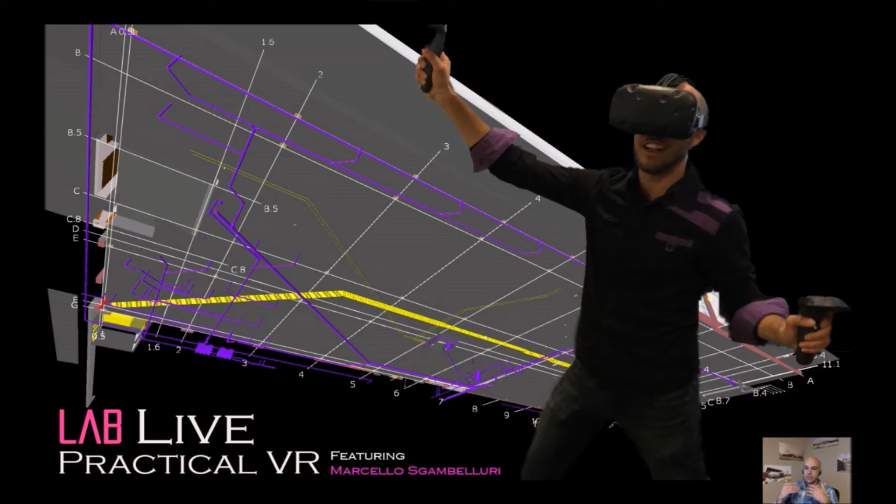What I want to do is introduce you guys to Marcello. Marcello is the BIM director and technical evangelist at John A. Martin and Associates. He manages and implements the research and development and the marketing of BIM, Revit, structural design software, and visual programming for the entire firm. He creates 3D digital content beyond contract documentation. I think that's super awesome. He also creates 3D real-time pre-rendered animation, the use of real-time physics, and the use of game engines for a variety of tasks. He trains and educates designers, engineers, clients, and basically anybody that wants to be learned up. He also creates tools and add-ins to improve Office BIM tools, efficiency, structural design tools, including Revit, Dynamo, Grasshopper, Rhino, Tekla, Stingray, SAP, ETABS, RAM, RISA, and many other software.

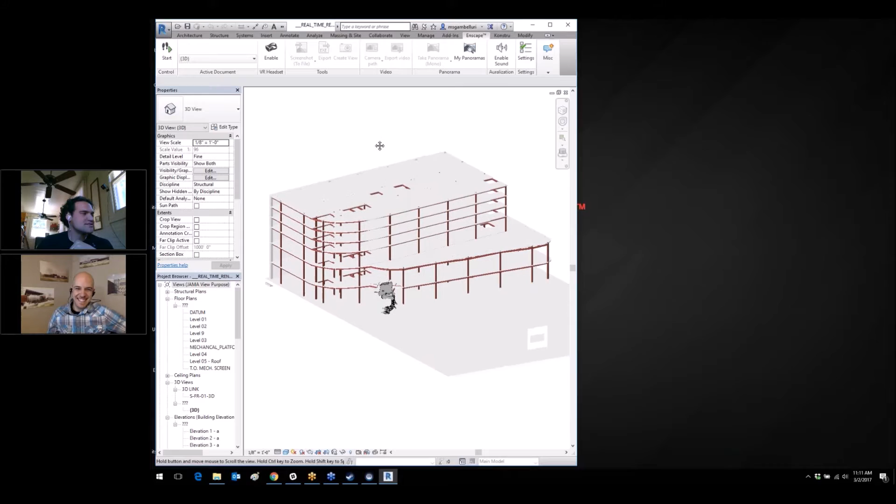I have a bit of a structure bias, so a lot of the examples will show structure, but this course could be applied really to any discipline. So you have your modeling software, whatever it is. In this case, I'm going to show Enscape. Enscape's a great product to get you in and out of real-time visualization, as well as virtual reality.

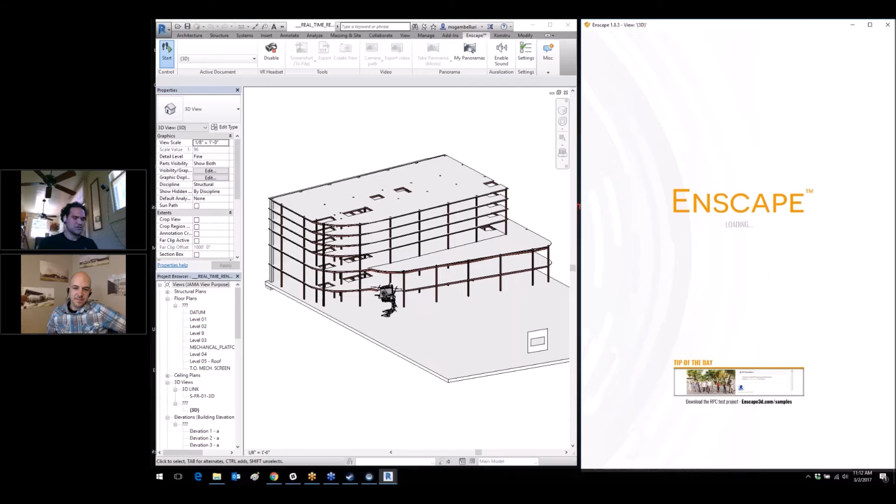All you do is first get yourself an HTC Vive or an Oculus, and then click this Enable button, and fire up Enscape. If you have the Vive, you can see behind me those are the sensors. There's another one in front of me that triangulates my position, and then I've got two handhelds.

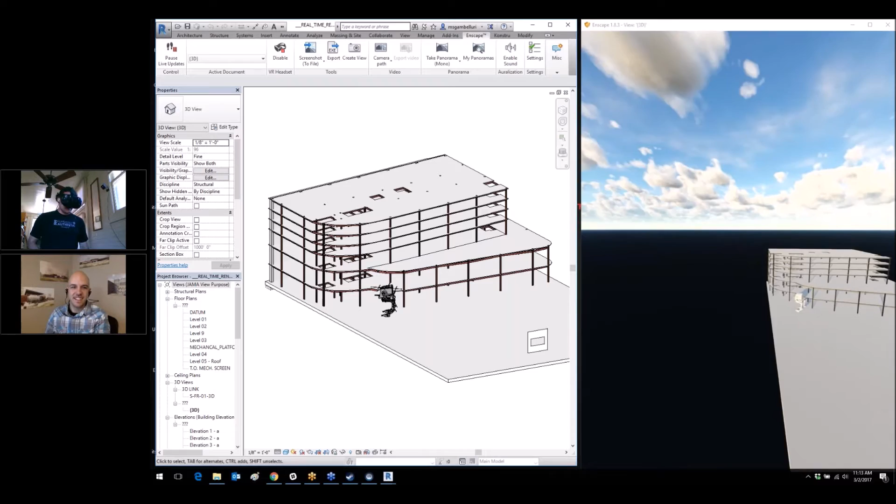You've probably been walking around the conferences and seen people doing this, so this is nothing new. But what's really amazing is everything's in real time. What I like to use virtual reality for, and real-time rendering, is actually quality control. With the controllers, you're not only looking through the model, but you can also quality control it. Using these pads, you can fly and float around.

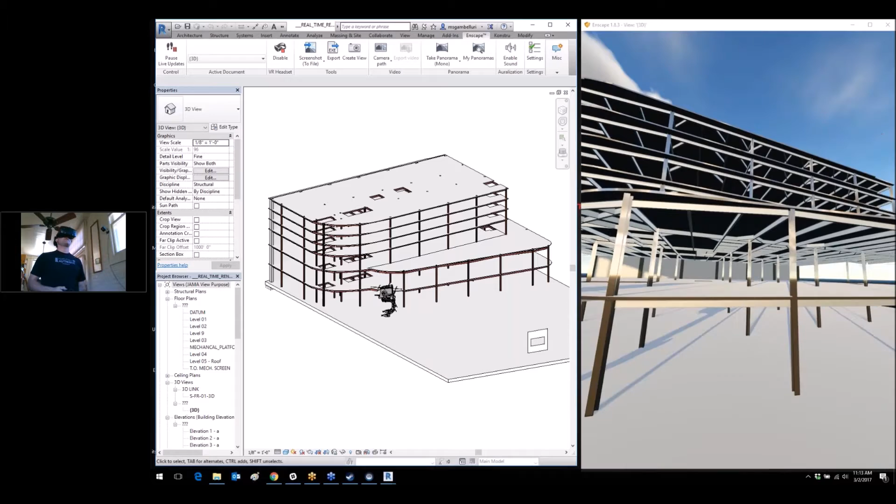We don't have time to go over the other products out there, but there's Iris out there—I saw that Anna's on the line too. They make a great product for visualization with Revit, SketchUp, and Rhino. And Enscape just added a beta version for viewing your SketchUp models. But basically, you have this amazing environment to do a lot of your visualization with.

So what we'll do in the office is build a model, and when it's done or in production, we'll go through and use virtual reality for quality control. A lot of times with virtual reality, you teleport a lot.

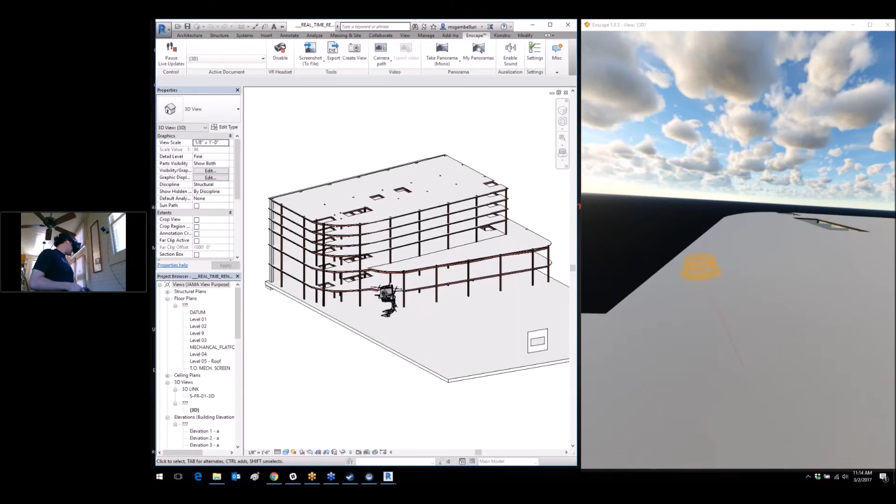The reason you teleport a lot is because when you actually move around, you can get quite dizzy. I thought I wouldn't be able to get dizzy, but you actually do. So you have to teleport around quite a bit. Of course, you can walk around as well.

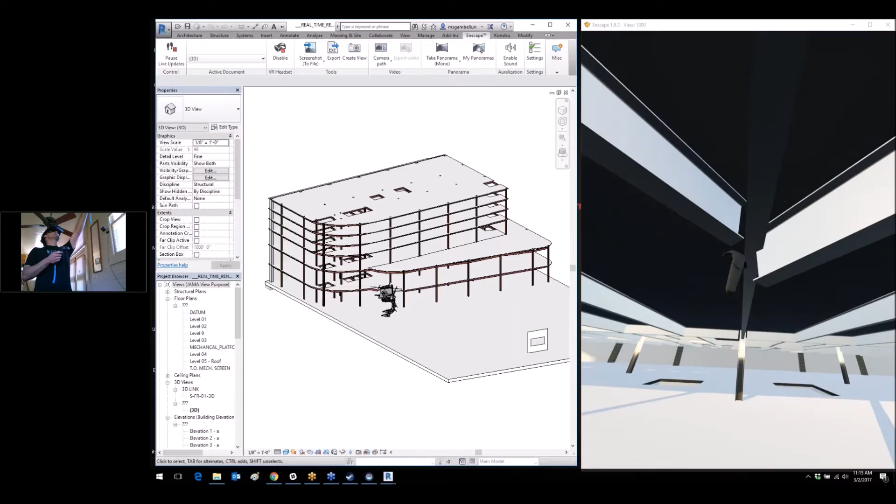We look around the model and try to find issues, and I actually found one right here. It looks like this kicker beam is actually too low. So there's a few things you can do now.

Because you're completely immersed in virtual reality, you can't see anything around you. So you could have someone working with you and tell them to fix that, or you can rip off your headset and go to your computer to fix it. But I'm going to show you a trick I do all the time that I don't think a lot of people know about, which is the HTC Vive and the Oculus allow you to toggle and see your desktop.

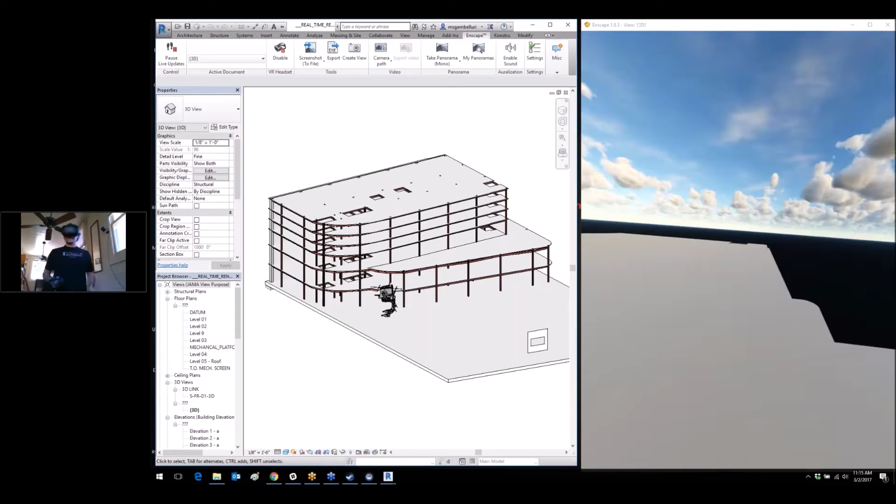So I'm going to go ahead and try to manipulate Revit just using the HTC Vive headset and controllers. The first thing I want to do, because a lot of times I do this when I'm alone, is I need to turn off this slab.

So I'm going to toggle back over to my desktop. These are actually my mouse and my keyboard. So I can zoom into the model. Can you see I'm zooming in? I can zoom in and out of the model.

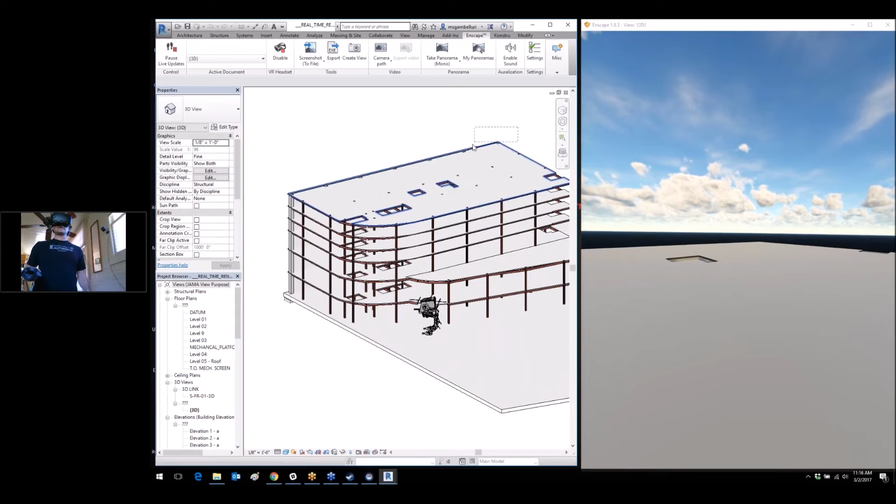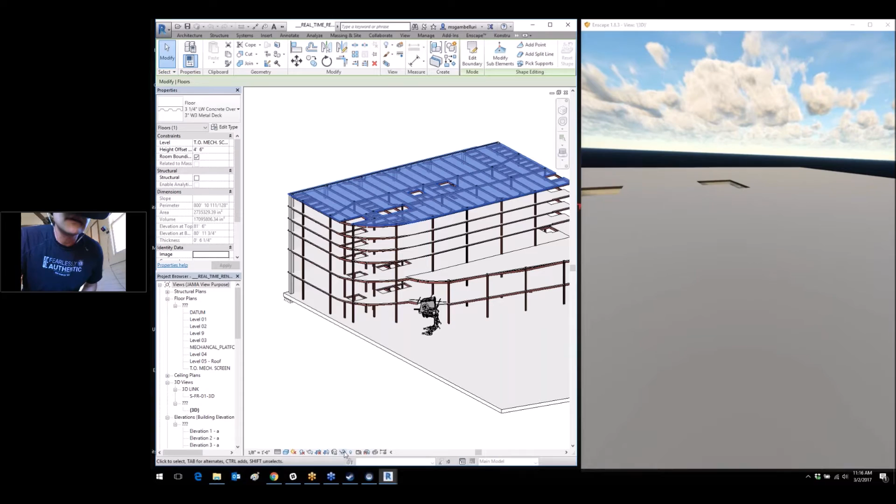I can actually select through filter and filter this out. So what I'm doing is using the HTC Vive controller to basically isolate the selection of the slab, and then I can come over here, see if I can get it, and then I can hide my floor slab.

Do you see that? I just hid the floor slab and I didn't even need to get out of the HTC Vive. Does everyone see that? Bill, could you see that? Yep, we see it. Okay, awesome. So now I don't have to tell my friend, I can just do it.

But these things are super powerful, amazingly powerful. You can actually go ahead and manipulate your Revit model. So I'm going to make an attempt to fix this beam using my controllers. Now, this doesn't have to be a beam, it could be a window or anything else. But remember, these are mice, and you have access to your desktop.

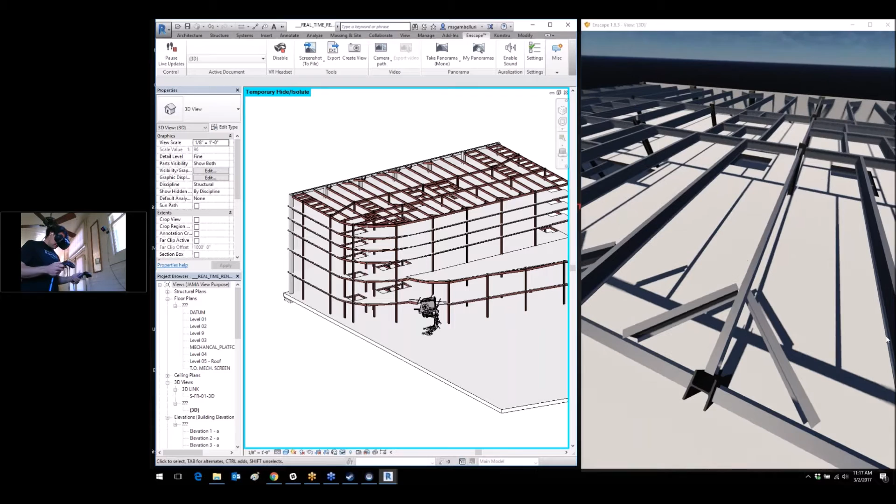So what I'm going to do is position myself over there with that rogue beam. See if I can turn it. Get over there, so I have to teleport. All right, there it is. The ICU beam, right? You see it? That's actually a kicker. It needs to be aligned with that one.

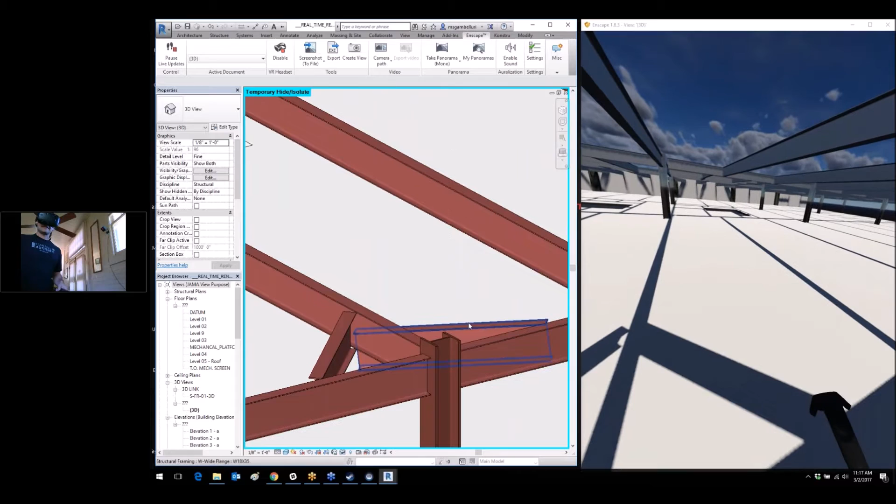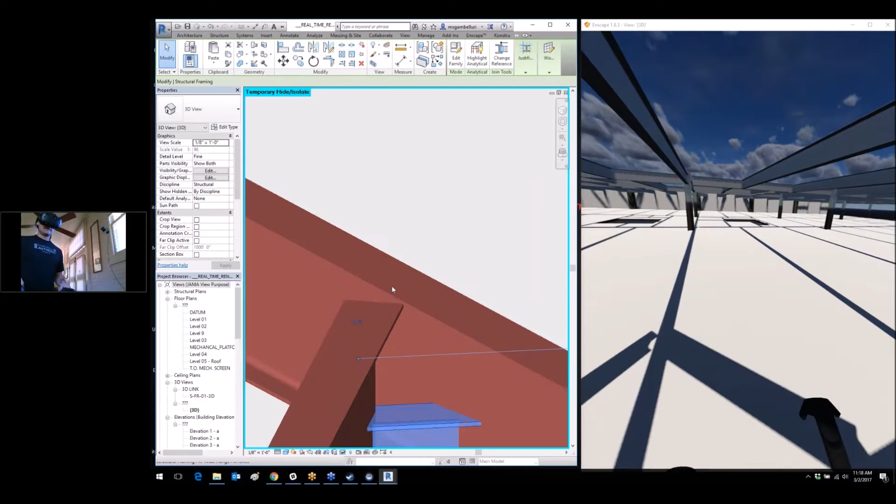So I'm going to flip back over to my Revit model, zoom in, and fix it. All right, let's do this. Here we go, grab the end of the beam. Oops, do it again. Okay, grab the end of the beam. Let's see here, see if I can get it. There we go, did I get it?

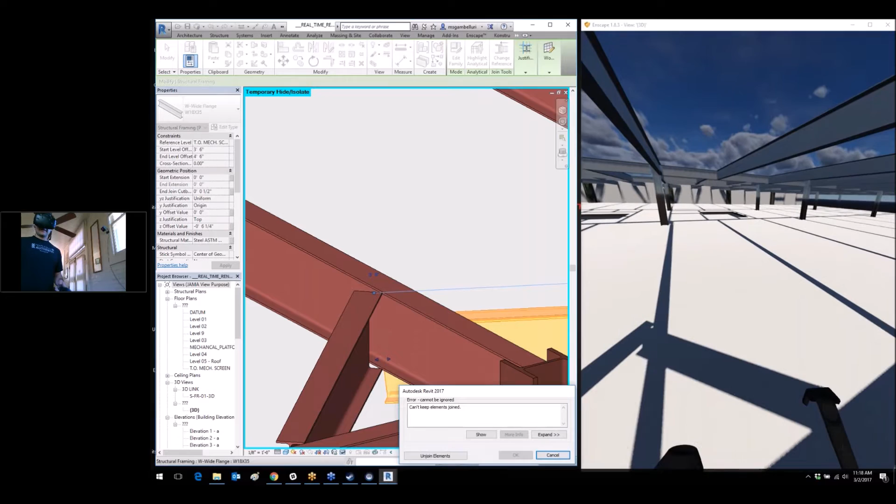And by the way, I did this super quick when everyone wasn't looking. But anyway, you get the idea. Come on now, I'm gonna get it, Bill.

You keep talking. So Angelo is saying like we need a VR controller for Revit. Like, yes, you can do it, and it looks like you got it moved up. Yeah, I got it.

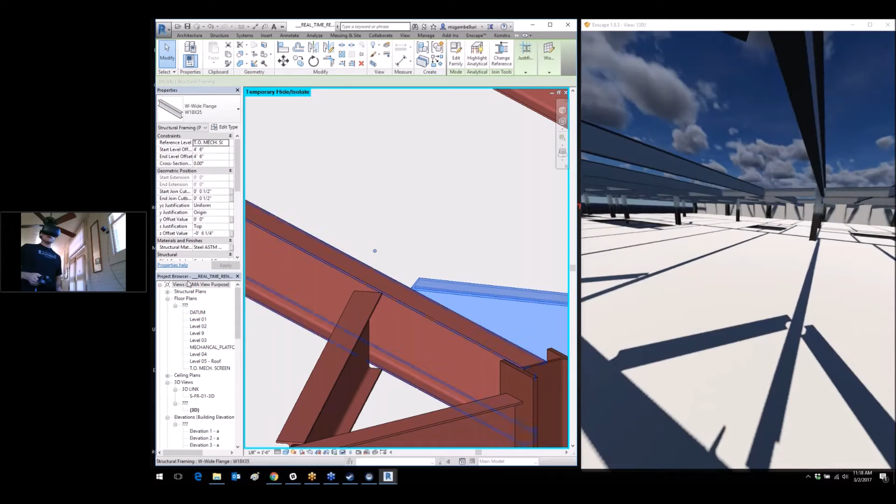Okay, so there was a question, let's hear it. What was the question? Angelo was just saying like we need a VR controller made for Revit. Do you think that would probably help that situation, or do you find the HTC controllers are pretty intuitive, Marcelo? The HTC Vive controllers are very intuitive.

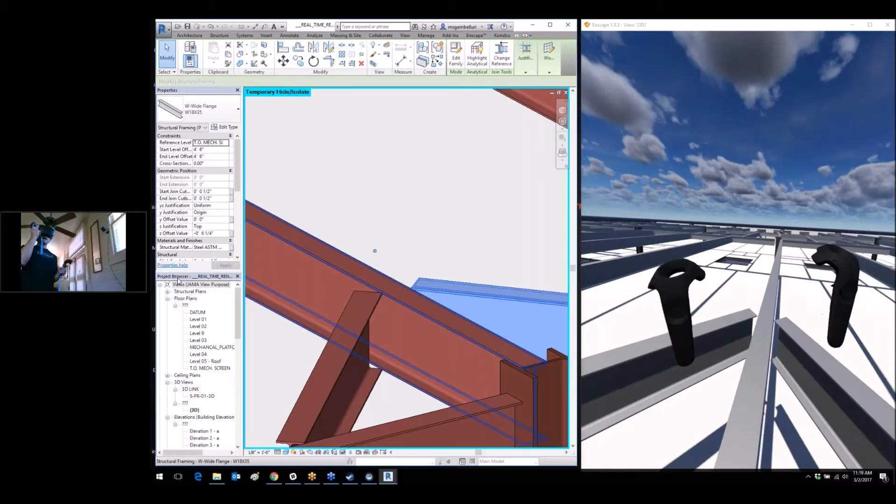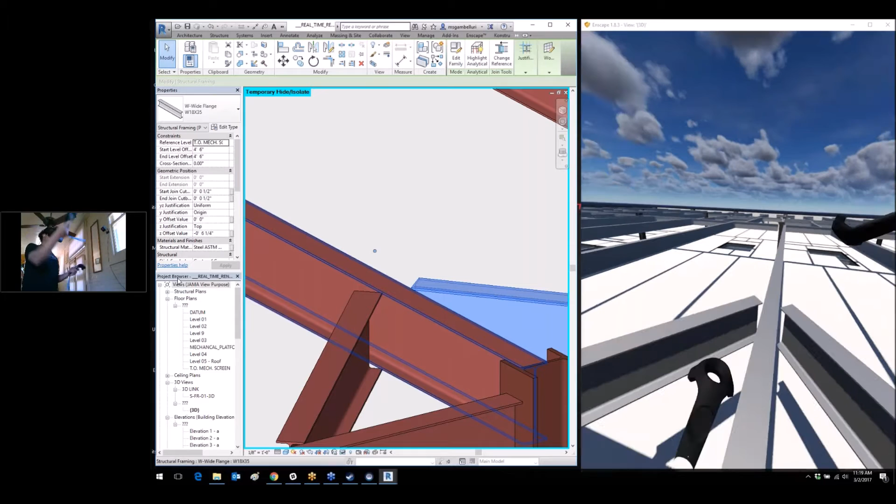We're at the beginning of our presentation, I'm going to show you how it gets a lot easier. But it would be better if there was a bit more control with the HTC controllers. Right now you only have laser control, but I'm going to show you other programs like Tilt Brush where you're allowed to actually grab the elements and rotate them into place. It would be great to have that kind of functionality within Revit.

So let's talk about that for a minute, which is kind of a segue into what I want to get into, which is the industry right now is focused on visualization. So you have the ability to make changes, but they're not the greatest in the world. But you can make small changes, and I quite honestly do this all the time, kind of in a quality control mode, not so much in a full modeling mode, as working with Revit at this point in time.

But I hear that that's changing, and there are programs out there that do allow you to do some manipulation, and I'll get into that in a little bit. Does that answer that question?

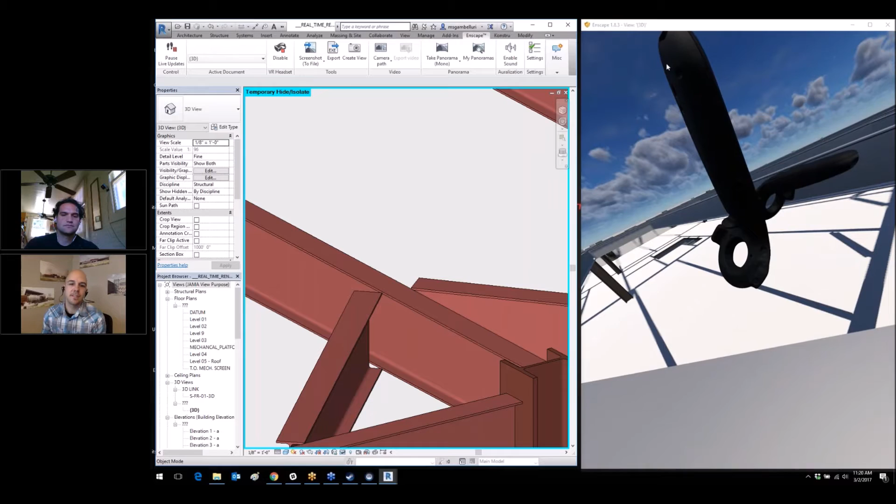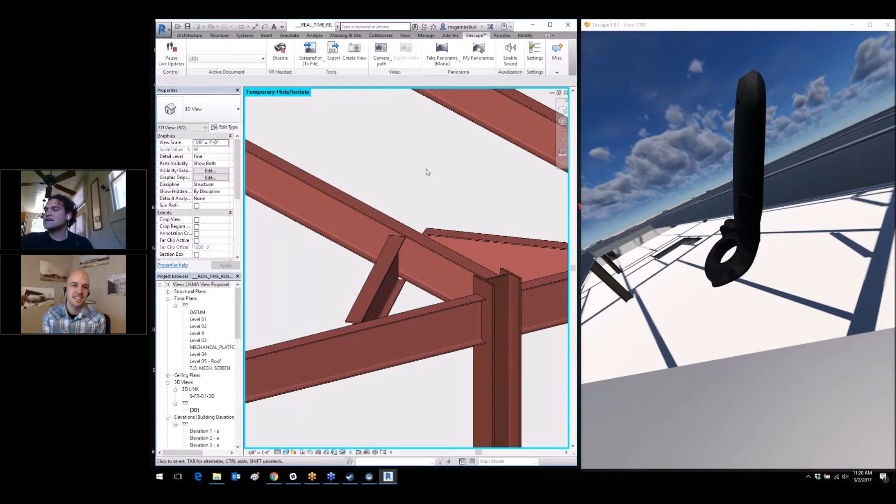I think so. So another person, John, is asking, can you control the Revit model with Oculus Touch controllers or just the Vive? That's a good question, they work a little differently. I haven't been able to do it, but I'm not the Oculus expert. We might have to get someone else to chime in on that, because what the HTC Vive controller doubles as is the mouse, so it doesn't work 100% like the Oculus, but I challenge the listeners to try that.

Also, what you can do when you're in the virtual reality environment is toggle this and get the keyboard. So a lot of times if I need to make a change, the model's already built, I'm in quality control mode, I need to make a change, a beam needs to be moved from 1 foot to 2 foot.

I can actually select on the beam and switch over and select onto the dimension, and then I can click this trigger, and then I get the keyboard, and then I can type in the number and hit enter. So there's a lot of things you can do with this at the moment, but really I'd recommend it for stuff that's already built.

If you're using Revit and some other visualization tool, I don't have time to go into it, but there are others out there, like I mentioned Iris, but then also Fuzor. Fuzor, you can do the same thing.

Fuzor does allow you to manipulate and move elements within the virtual environment, although it's not linked to your BIM data necessarily. So if you were to grab an element and pull it, you could certainly do that, but you don't have the ability to actually change the physical parameters like you would if you were just to use this on the Revit model sitting on your desktop.

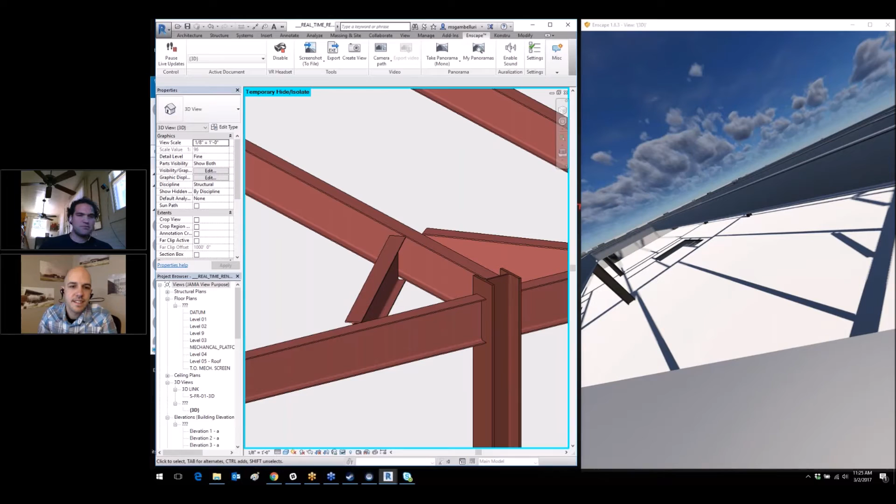So let's talk about Live and how it plays into this whole virtual reality picture, and how it's a bit different in some ways. Live, I won't give the full demo, but just like where you send the model over to the game engine, it's right here. Can you see my screen, Bill? Yep, okay, and so here it is, Revit.

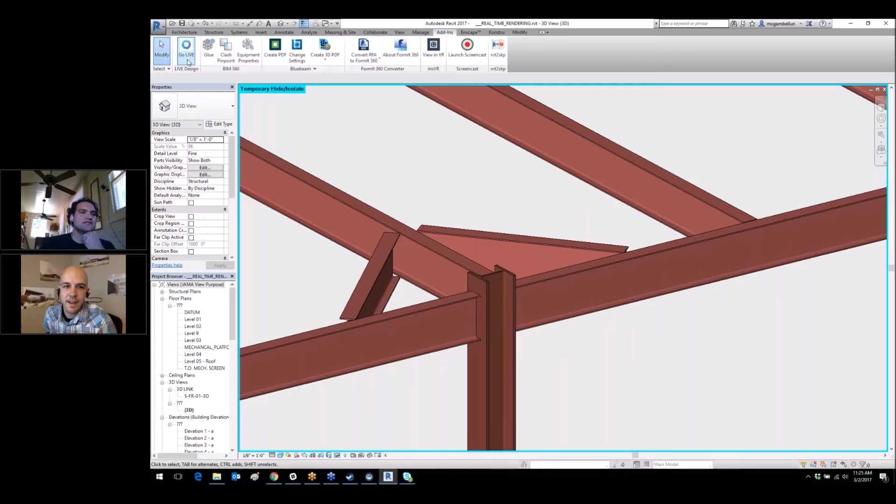Go Live—yeah, so you would take your Revit model and hit this right here, Go Live. That would send your model up into the cloud. It takes a little while longer, but what it's doing is building all of your elements inside the Stingray game engine. Then you can open it up in the viewer, or what they call an editor.

So let's get this fired up. Maybe at this point in time, Bill, we should see if there's any questions while I load this up. Yeah, so this is actually good timing.

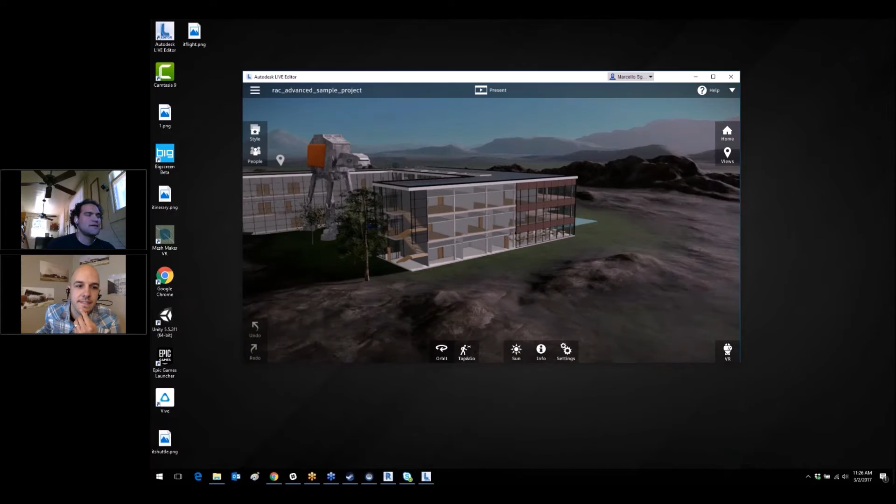So Angelo was saying that he hasn't been able to get the same quality on screen with Live that he has gotten with Stingray. Have you experienced that, Marcelo, or do you know about that? That's a good question—we'll have to ask the developers. I have not seen that.

No, I haven't experienced that with Live. We'll do some research on that, but personally I haven't seen it. I have seen a difference with Unreal, though. Unreal seems to do a slightly better job with realism for the materials than Live, but I'd personally consider Live and Stingray to be comparable.

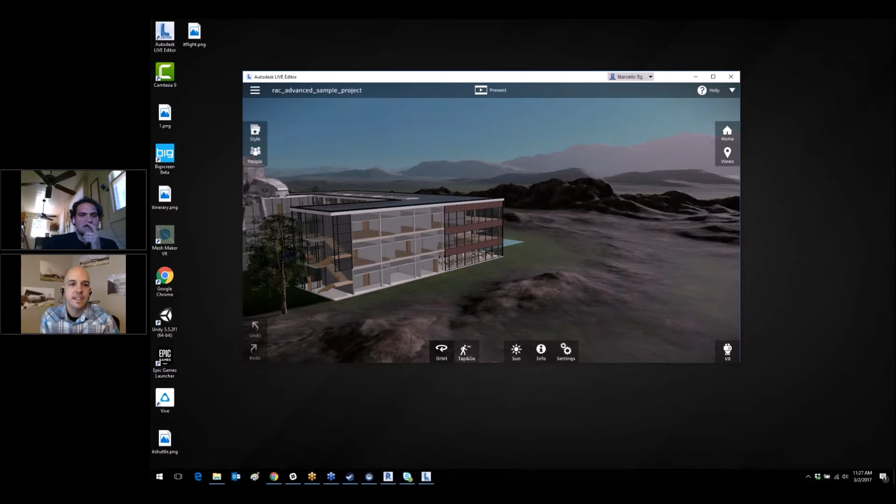Okay, so basically you upload to Live, and this is a sample project. I put in a bunch of extra goodies in here. Now, you can't do that directly with Live, but you can do that with Stingray and then bring it into Live because it's the same game engine. I'm a Star Wars fan, so I've been practicing a lot with Star Wars.

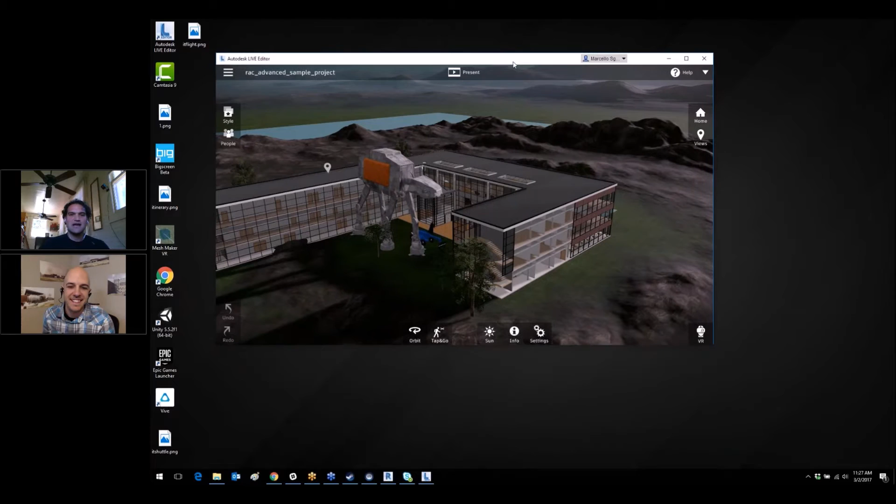But anyway, I want to show you how this works. It's very similar. You go ahead and fire up this one, which would be your virtual reality, and if you're way up high, it puts you into this cart. Let me jump back in real quick.

Okay, so I want to show you some of the differences with Live. There really aren't a whole lot of differences from a visualization standpoint. Can you see my controllers?

Yeah, we see your controllers. I want to mention, some people are asking about the lag. There will be a little bit just because we're doing video, but what Marcelo is experiencing is completely streamlined, so his quality in the headset is much better than what you guys see. Give us a little grace on that, since it's a GoToMeeting and we're streaming video over that, but that's resolved when you're actually using it yourself.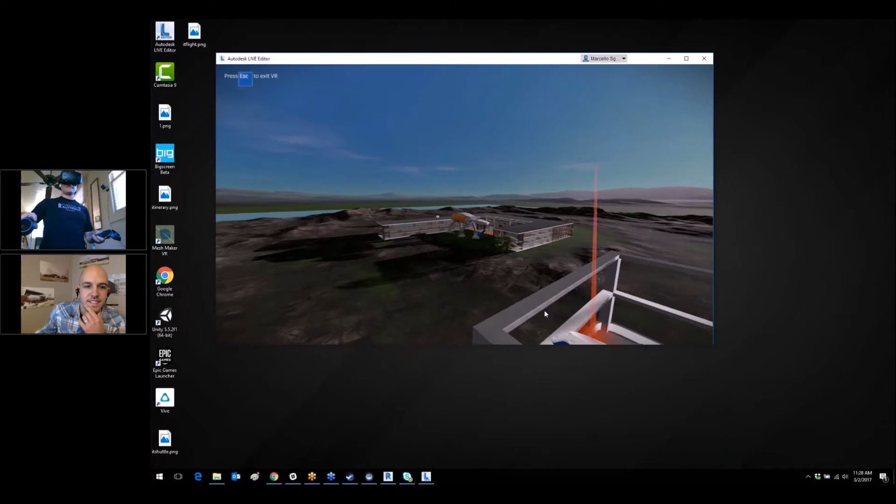Thank you, Bill. All right, so comparing apples to apples on a visualization standpoint, there's not a whole lot of difference with Enscape and what you'd get with Live, or honestly, with any product.

One thing that's really nice about Live is it allows you to teleport. Let me get over there into the room. But it's linked with your BIM data. I'm not necessarily favoring one over the other, but one thing that's really nice about Live, and Iris also has this, is you get this mini map.

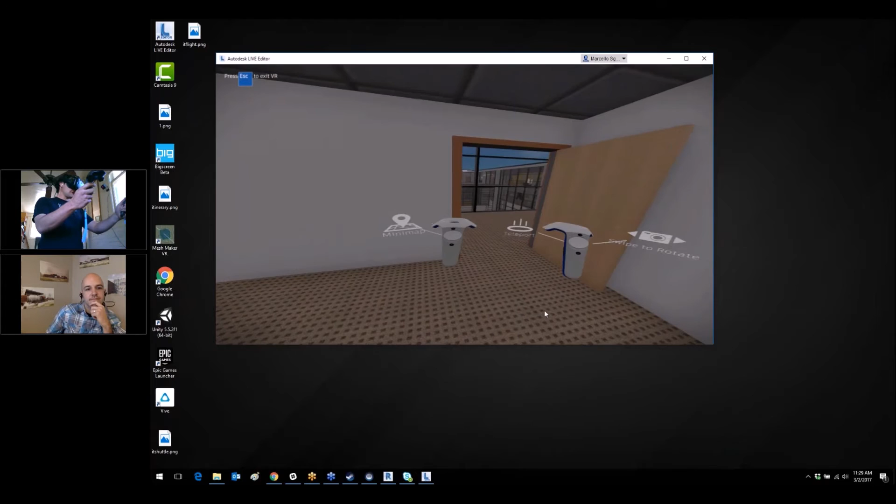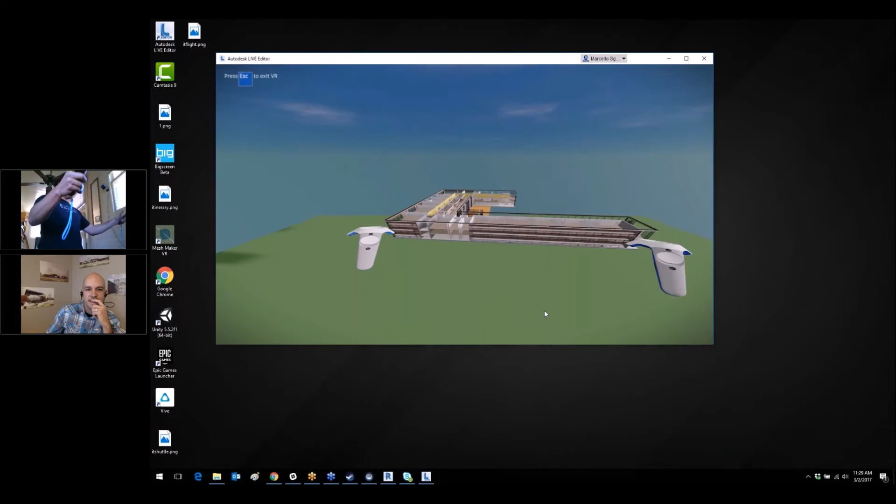This mini map, honestly, is really what I use Live for. You have the ability to move the model, and you're able to scale it, zoom in and zoom out. This becomes really good because when you want to see the model as a whole, especially as a structural engineer, we love to look underneath the building and see the footings.

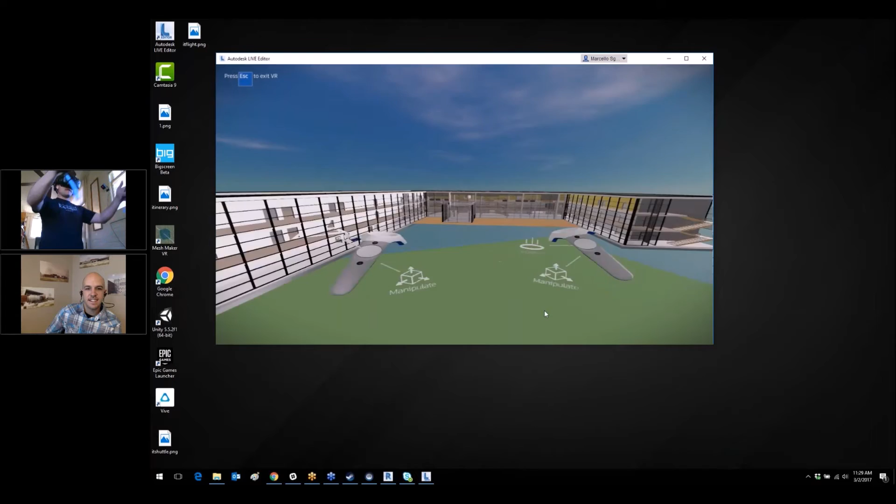Of course, this one doesn't have any, but you could just immerse yourself in there rather easily. You have the ability to move things back and forth, put your head in and move around, and it's extremely powerful in that regard.

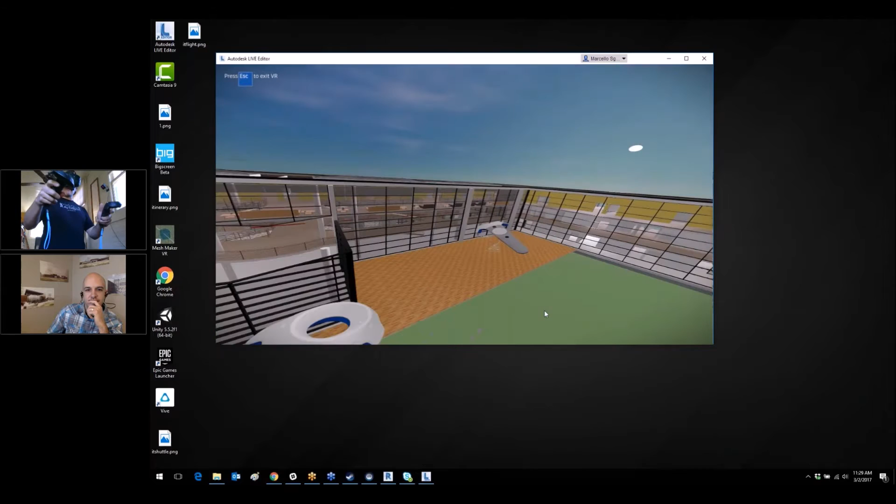It does auto-pull the roof off for you, although I understand they're probably working on that. Right now there's no ability to toggle anything on and off, but you can teleport from the mini model into somewhere else. Okay, so now we're inside the model.

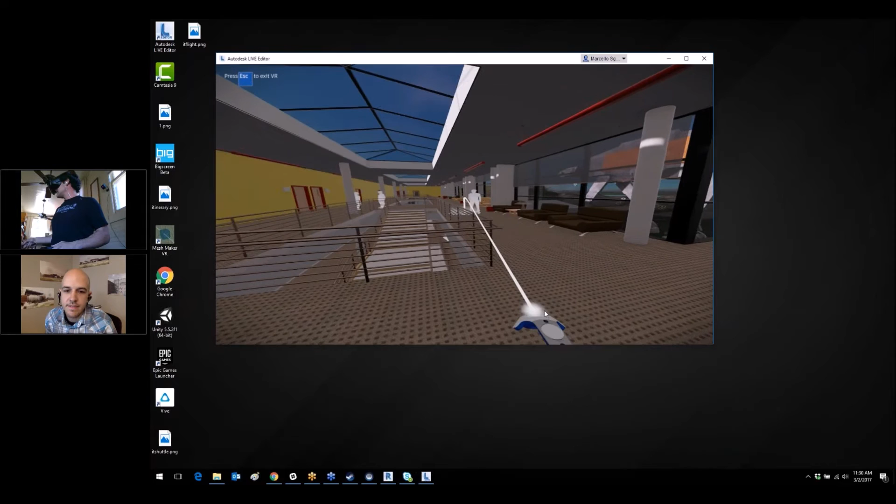What's nice too about Live, because it's linked to the game engine, is you can animate your entourage. You can kind of see them moving—yeah, you see his arm. And then also you have the ability to...

add extra things that you normally couldn't add. You have the ability to customize it. Can you see what I'm looking out at? I'm looking at the ACT, and I was able to animate it in Stingray and bring it in—I'll go over that in a bit. I was also able to bring in some of my Revit models. That's the telehandler I built in Revit, and I actually built this ACT in Revit as well. And then there's Darth Vader over there, animated.

So you get the ability to customize, which is great, and I'll go over that in a little bit. All right, are there any questions about Live before we move on?

Right now, Live doesn't allow you to float. You do have to stay grounded in reality. So I can't float up to that corner if I wanted to, like I could in Enscape. I can't just float. You have to stay grounded as you would in real life.

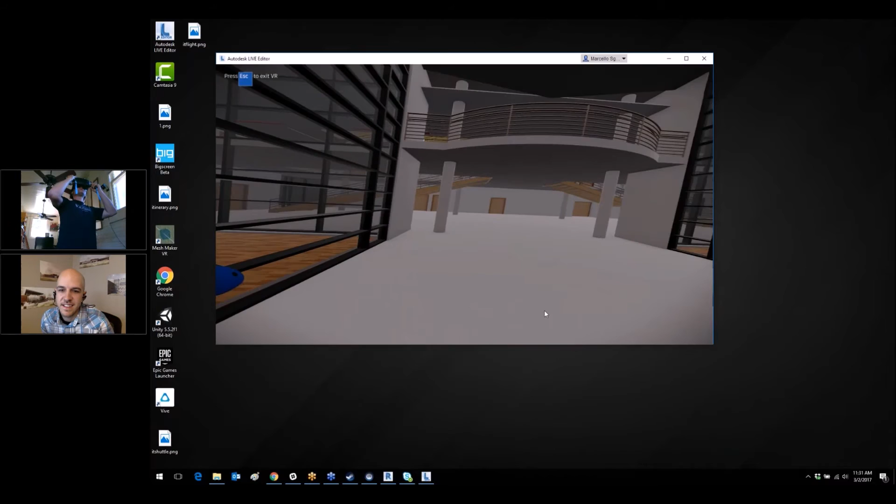So first one is, what are the prices for Enscape Live and the Unreal translators? Is there a price difference? Are they kind of close?

No, can't hear you. Sorry guys, I think there's just a little bit of audio issues. So we're gonna have Marcelo dial back in, so I'll buy us a little bit of time. There is some questions in here.

People are asking about the Magic Leap One. I'm curious if you guys have used that while we're waiting for Marcelo to come back on. Have you guys used the Leap One at all? Just curious. You guys can populate that into the chat window. So no, I haven't used that. I don't know if they're available yet. It'd be interesting to see how those work.

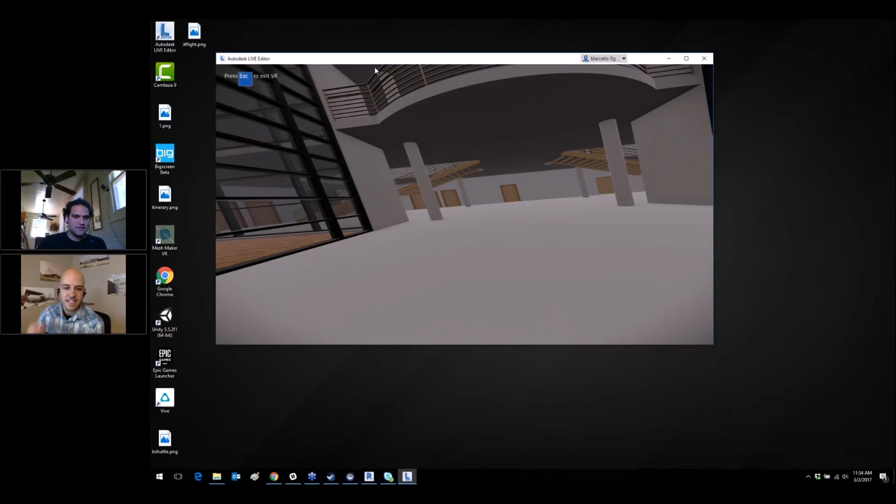In fact, why don't we ask Bill? Could we ask how many people have used Google Earth in virtual reality? Because this is actually a big part of our workflow in the office. And I'll go ahead and do a little tiny demo here, see if I can get live. So have you guys used Google Earth yet with virtual reality?

Mostly no's, we got a couple yeses. Nolan or Cillian said that he has. Brian says he has. John Young said he has used it. So a couple of them, maybe like about 10 or 15%, I would say have used it.

Others have not. I think this is a pretty cool example. Yeah, I'm trying to get it up here, see if I can do it. They want to know if the Street View app counts. You'd think. You know, my Google Earth is not coming up. I don't know why. Boy, that's not... it says it's running. Let me try to. Oh, I see, give me one, okay, give me 1 second.

I got to go talk to it. Sometimes the app you have to kill it in the background.

And I'm curious, well I'm gonna just ask. So while Marcello's opening that, I have one other poll I wanted to ask everyone: how many times have you seen Marcello speak? Have you ever seen him speak at a conference, read his blog, listened to his podcast, watched him in a webinar, or had the pleasure of meeting him in person? You guys better be picking that one. You make up that poll? Oh my goodness. I did.

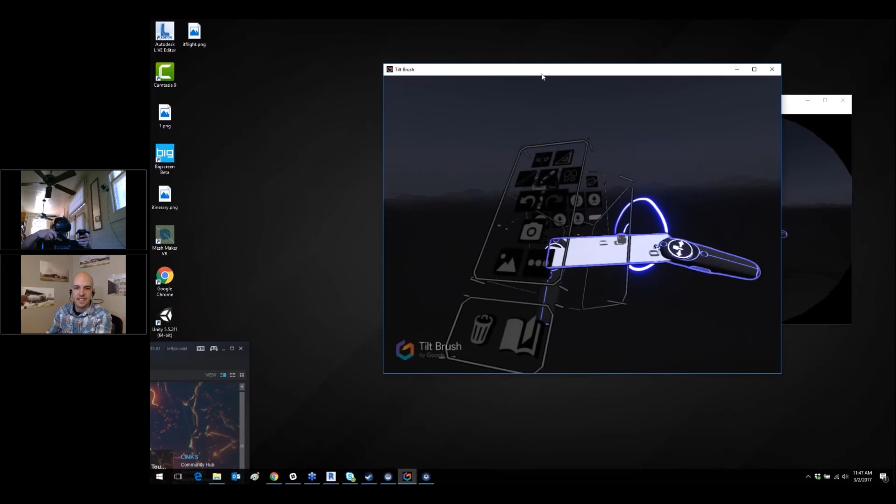This allows you to click and see my roof. This was actually the roof you saw that I turned off in the model. This would be a roof with some chimneys on it, and these would be like little dog houses sitting over with stairwells. I guess this would be the stairwell, right?

You also have the ability to do a straight edge, if you want to be artistic, and you can change all this. I won't geek out about Tilt Brush because it's very artistic, but you get the idea.

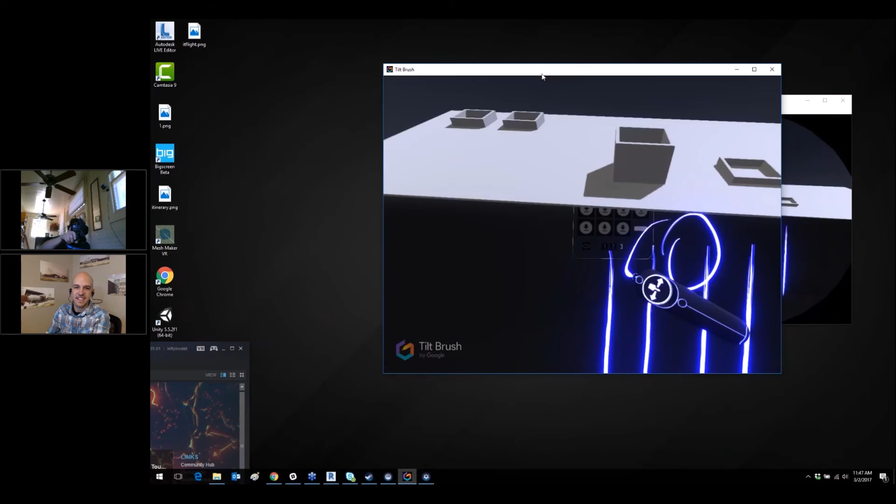What's really nice is you can pull and scale this, and then if I wanted to, I can place my roof crickets. Where'd it go? Here it is, like here's a roof cricket. I could place these down and scale them, and all this stuff.

So I have the ability to do this and lay things out. You can copy this, then bring in another one, move it around and scale it. I quite honestly use Tilt Brush all the time.

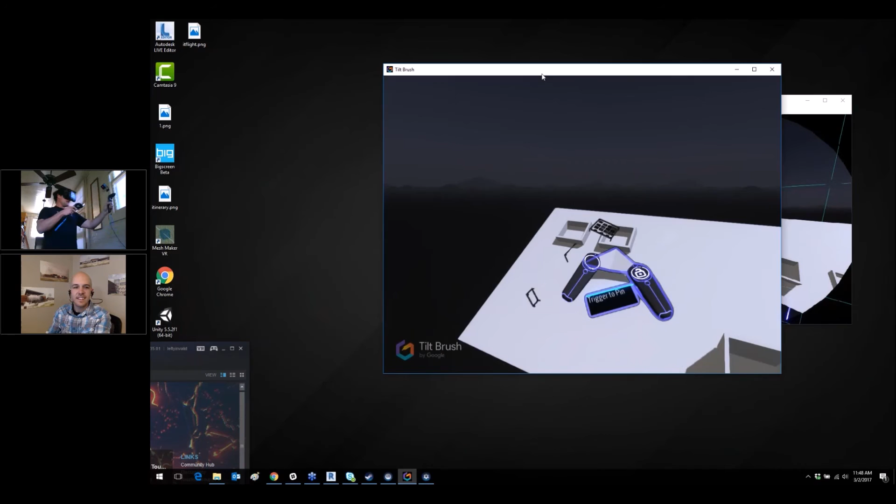Once you get your things set up right, it's a touch limiting for exporting. Right now it only exports the physical lines you draw, not the things you brought in, but they're working on the ability to export everything you see, and that's right around the corner. You can export this as another OBJ, or it comes out as an FBX file, and then put that in your 3D modeling program.

A lot of times I'll use this for a markup tool at the office, to look at things and mark things up. Particularly in our office, we have to do a lot of structural modeling and structural analysis modeling, and it requires you to really zoom in close to certain things.

And then you can lock this down. This is kind of a simple example, but you get the idea. This is extremely powerful, and there are other programs out there that do things like this.

There's one called Mesh Maker that allows you to put nodes and meshes, nodes and triangles. It allows you to bring in models too. I won't go through the whole demo of that, but does everyone kind of get the idea?

Because I bring in, so you can delete all this stuff. I've got a bunch of stuff in here, but it'll bring in just about any complex model. Where'd it go? Brought in, right? Look at this one.